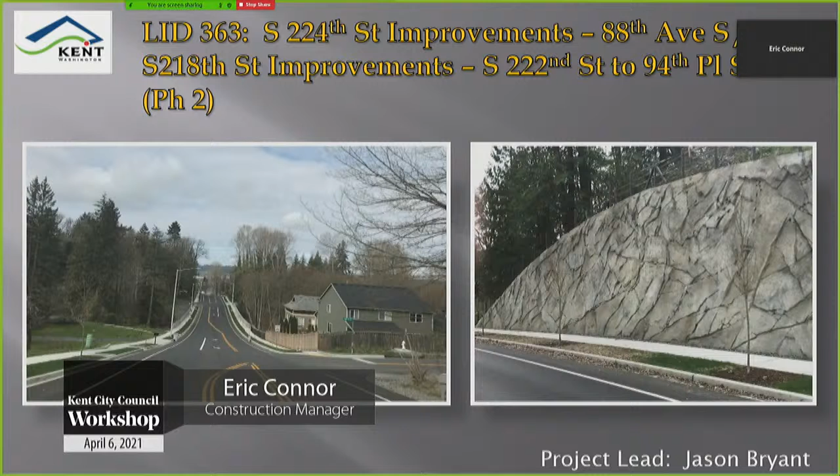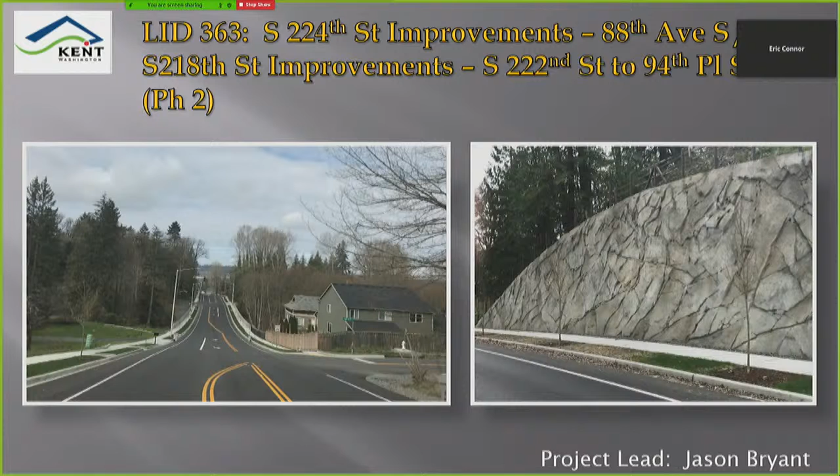New sewer main, water main, storm piping, storm detention, retaining walls, and a new bridge over Garrison Creek were all constructed as part of the widening and revised alignment of 88th Avenue South and South 218th Street.

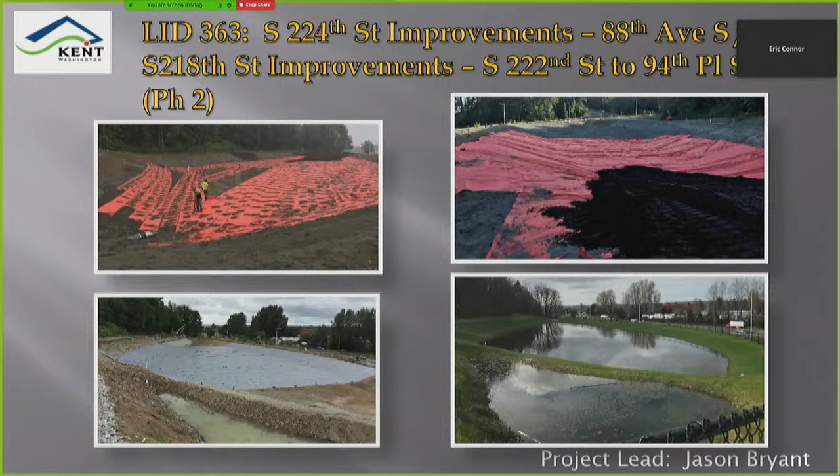One of the last orders of business as part of phase 2 was the final construction of the site's permanent stormwater detention pond system. This work had to wait for the dry and warm weather of the summer months of 2020. The pond was excavated and shaped, then lined with layers of sand, fabric, more sand, impermeable liner, another layer of sand, and a high visibility layer, and then finally the topsoil. You can see the finished product out there in the bottom right corner, a fairly recent photo from this spring.

Moving on to our next really big project, South 228th Avenue UPRR grade separation project. Jason Barry presented to the Public Works Committee while phase 4 was nearing completion.

Since then, phase 5 has taken over, completing some below-grade stormwater detention facilities, completion of fills required to complete the ramps to the new grades on both sides of 228th, ramps down to 6th Avenue, and several private business accesses and driveways, all while permitting full vehicle access to businesses and their employees, vehicle traffic, truck traffic, you name it. The guys have had to work around all that. This is not a small feat.

Fill material consisted of geofoam, lightweight fill, and imported aggregates supported by various types of mechanically stabilized earth retaining walls. You can see in the photos the white geofoam material that was placed to help prevent settlement in the future that could cause issues to the below ground infrastructure.

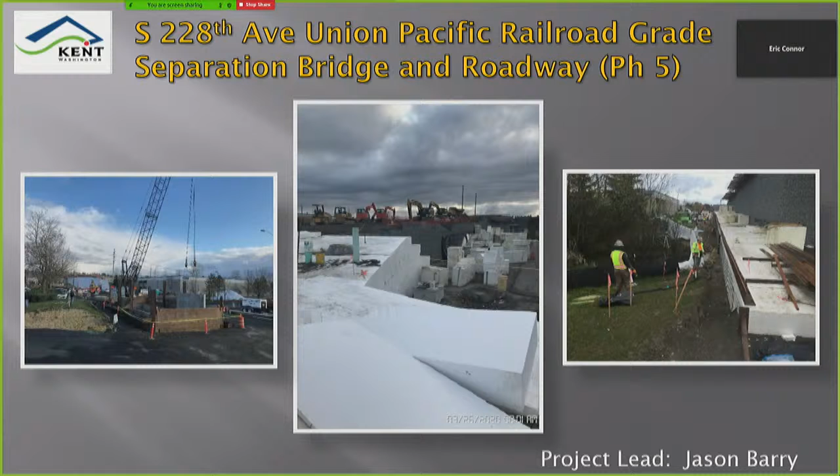As the earthwork was ongoing, the bridge construction was the project's critical path work. Concrete bridge piers were constructed. The three photos here show the bridge column rebar cages being formed in preparation for concrete placement, cross beams formed for bridging the three columns together, and then the completed structures ready for girder placement.

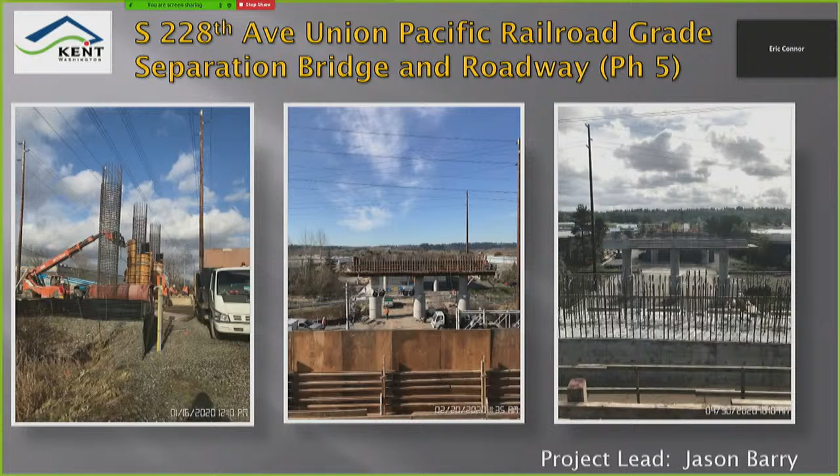Girder placement was a 4-day process for this bridge. Crews faced the challenges of working around the Union Pacific Railroad with no interruptions to the railroad, and working below a major high voltage power transmission line. Photos include the very first girder set in progress on day 1. You can see the two cranes working together in those photos to complete the girder sets. That's a very complicated, dangerous, and very sophisticated operation.

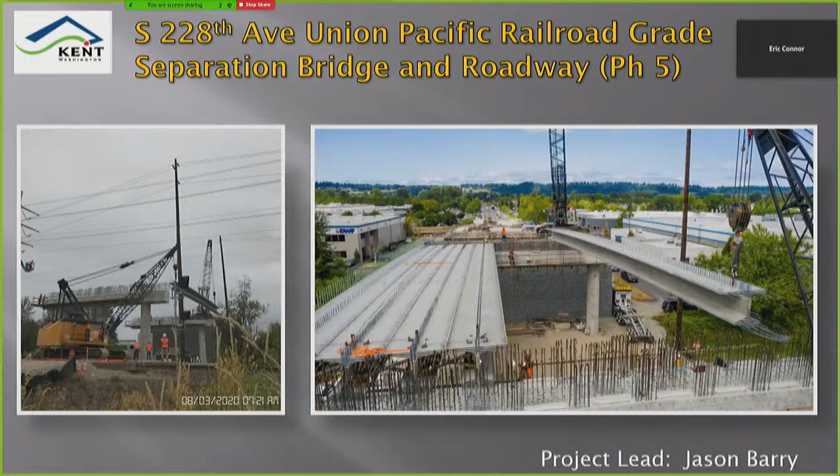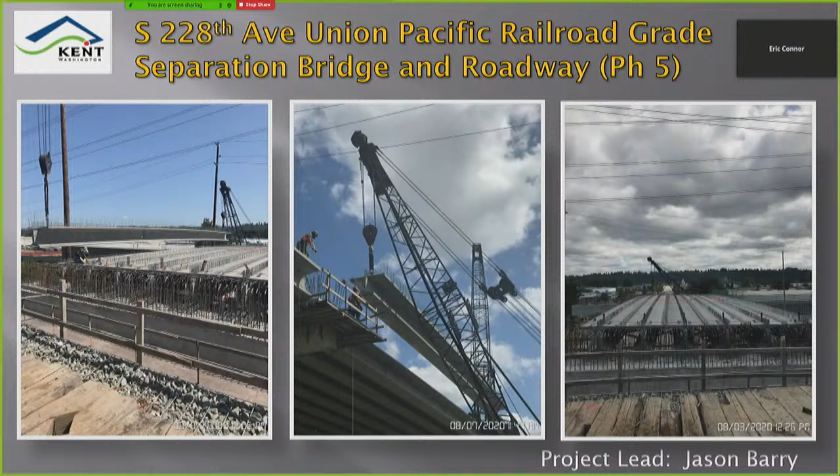Here's the final girder set, setting into place on day 4, with a couple different angles to look at it. That was the 24th of 24 girders. The last photos show one of the two spans with all the girders in place.

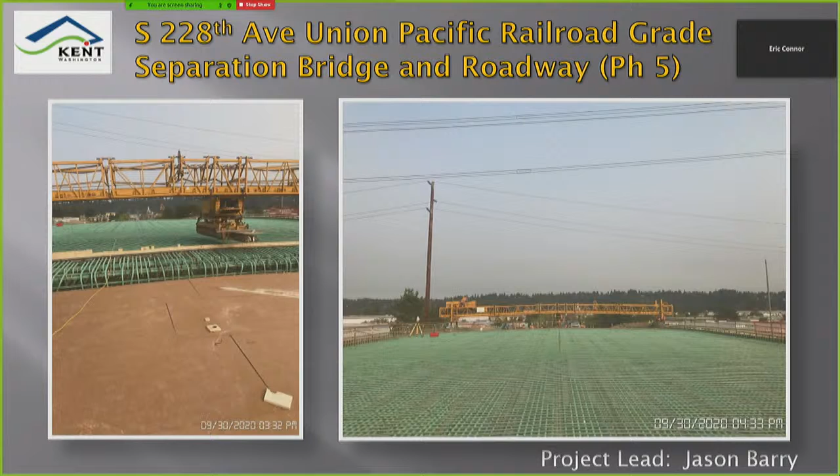And here's a look at the concrete crew and the Bidwell in action on the deck pour day. Once cured, diaphragm pours at each of the...

Once completed, diaphragm pours at each pier tie the girders together and the decking together. Approach slabs are also poured to connect the finished bridge deck to the ramps constructed out of aggregate fill and the MSE retaining walls.

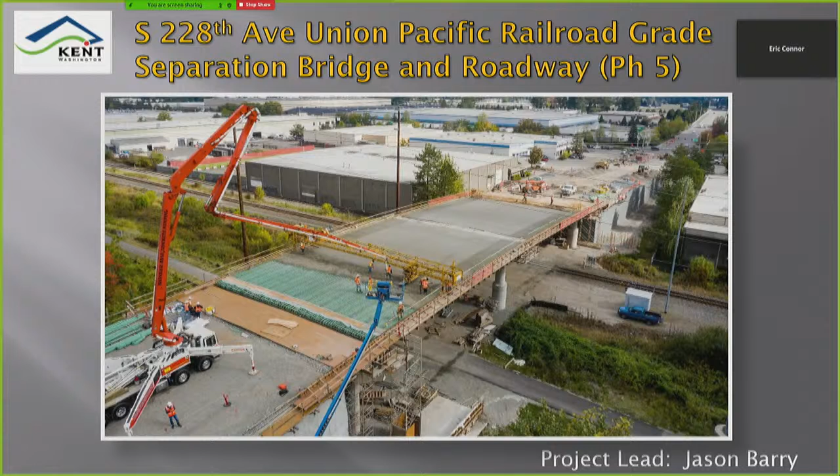After the bridge deck pour, structural crews turn their focus to the moment slabs and barriers in order to finish all the walls and bridge.

Concrete roadway paving also proceeded. Concrete paving was especially challenging with traffic management, just like the earthwork fill was. Traffic routes through the zone were rerouted about every 5 days on average.

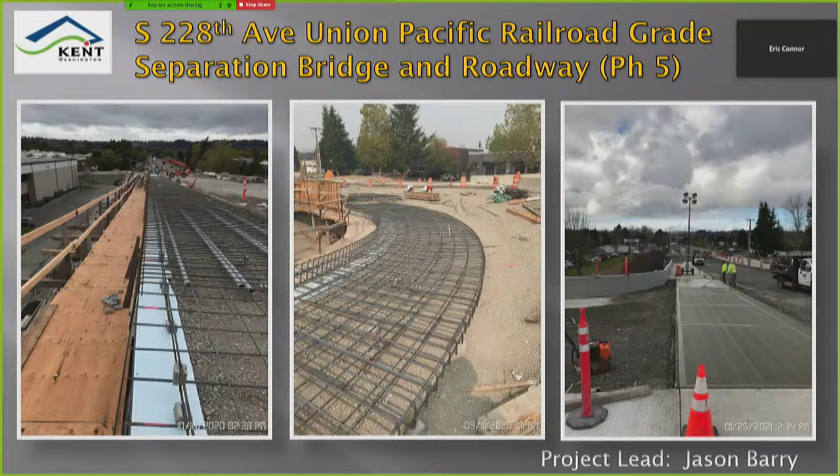So currently we have a project that is very near completion. Final installation of the illumination system is ongoing. Work in private parking lots adjacent to the building is being completed. Castings are being raised and final cleanup is taking place in preparation for the ribbon cutting next Thursday. The bridge will be open to traffic following the ribbon cutting.

Upper Mill Creek Dam is a multi-season project that was completed in 2020. The dam face was reconstructed and raised 4 feet with a new overflow spillway, controls, and discharge. In addition, a new fish ladder was constructed with diversion structures and high flow bypass.

The high flow bypass takes water into the reservoir from Mill Creek during high flow events. That bypass shows up kind of on the left-hand side of the right-hand photo. You can see it running through the trees there behind the houses.

We're very excited to see the completion of this project. Now that it's operating, we have one more tool to help control stream flows during storm events that produce high flows, and hopefully help with flooding in future events.

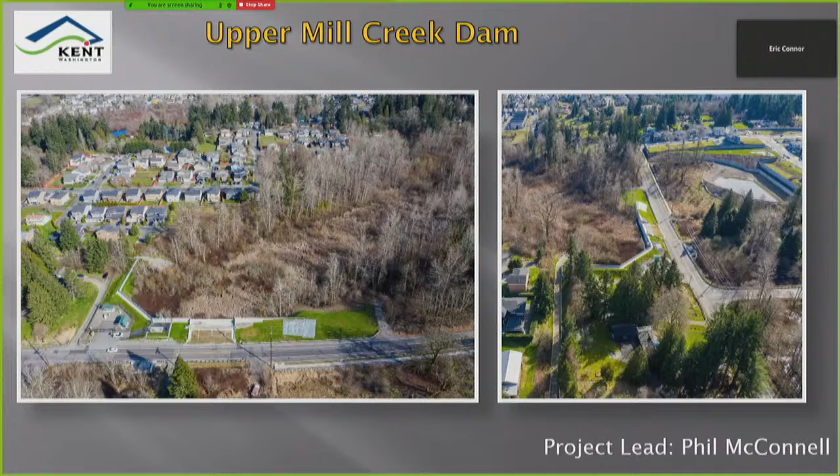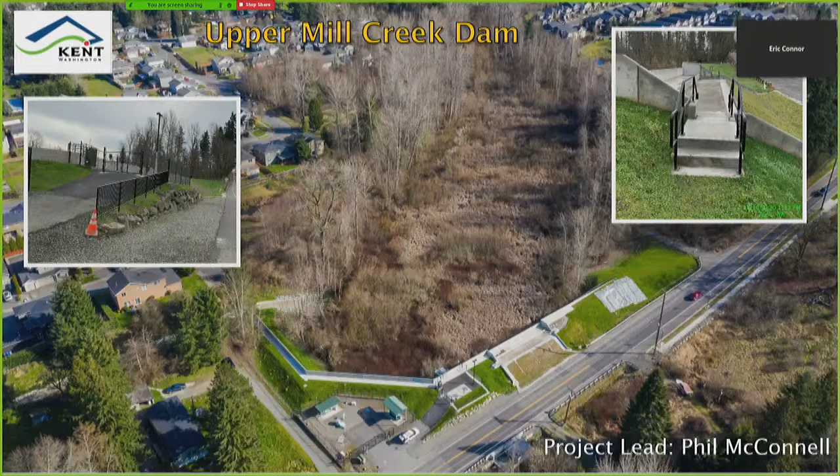On this slide, there are a couple of features constructed on the dam face. And the next slide shows the diversion structure that's kind of at the back side of the operation.

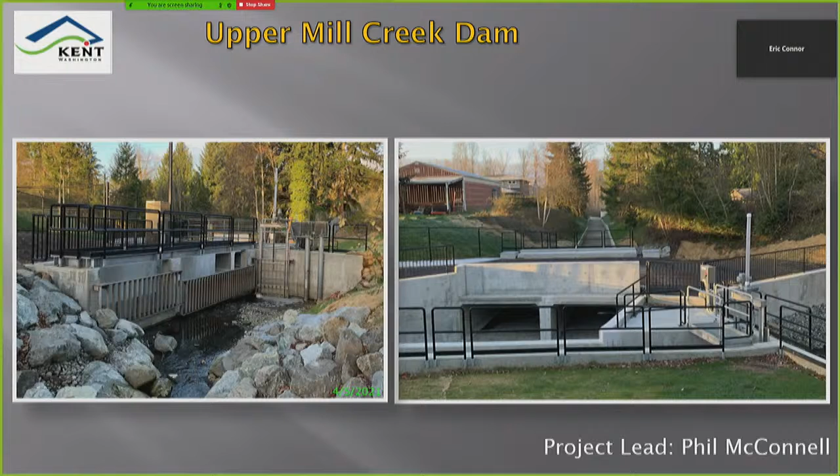You can't see it in the photo, but there's a fish ladder in there and a screen, and when the flows increase by a depth of 3 to 4 feet, which we control, the water is diverted down the channel. You can see it heading off there, and then it starts filling up the reservoir.

One of our other big highlight projects this year was 76th Avenue improvements. This was a fast-paced, hard-charging project from day one. The contractor was challenged with raising the grade of 76th Avenue about 4 feet while allowing truck and vehicle access to all adjacent businesses.

This was achieved by closing the road to northbound traffic and making it a one-way road southbound. One-way traffic was first routed to the east side of 76th, while fill was being placed on the west side, followed by construction of all new storm, water main, curb and gutter, sidewalk, and concrete paving.

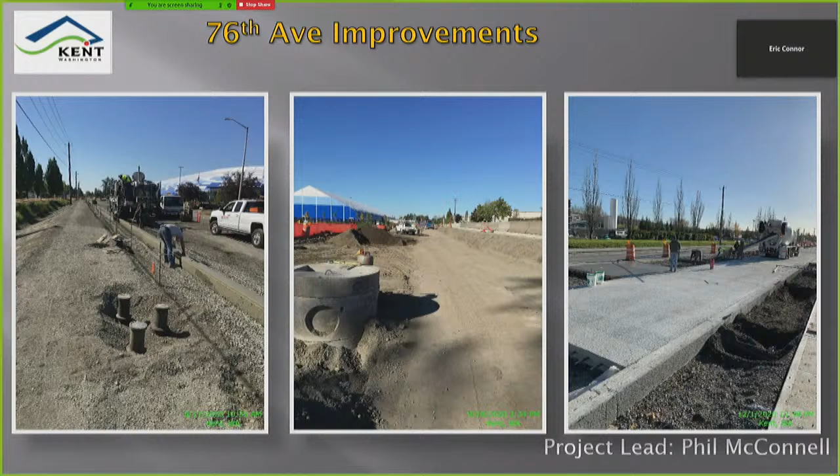Once that concrete was cured, traffic was diverted onto the new roadway on the west side, and the process was repeated on the east side.

Here's a photo of the concrete placement in the future northbound lane while traffic is running southbound on the original asphalt.

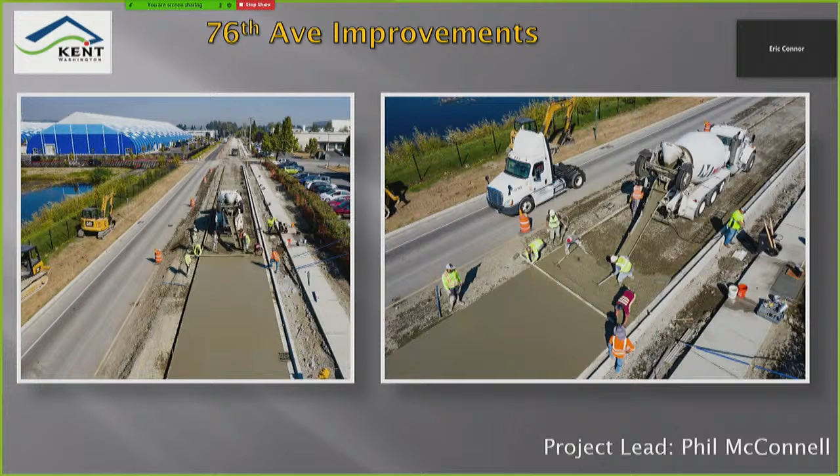Here's one more photo of the project in progress along with the finished project. Future phases of work on 76th Avenue are currently being planned or are in design. The road raising will continue north of this project to 72nd Avenue, and also to the south, with the addition of multiple culvert replacements to enhance flow in Mill Creek.

Councilmember Thomas, do you have a question about this?

Yes, thank you, Madam President. So am I to understand then that both northbound and southbound have been raised to the same height? Yes, sir. Excellent. Thank you very much. Yep, you're welcome.

Okay, now we're on to 4th and Willis Roundabout. This is one of my favorite projects that we did this year. The final product is a wonderful gateway to the city that enhances traffic flow, improves safety, and I really think it looks great.

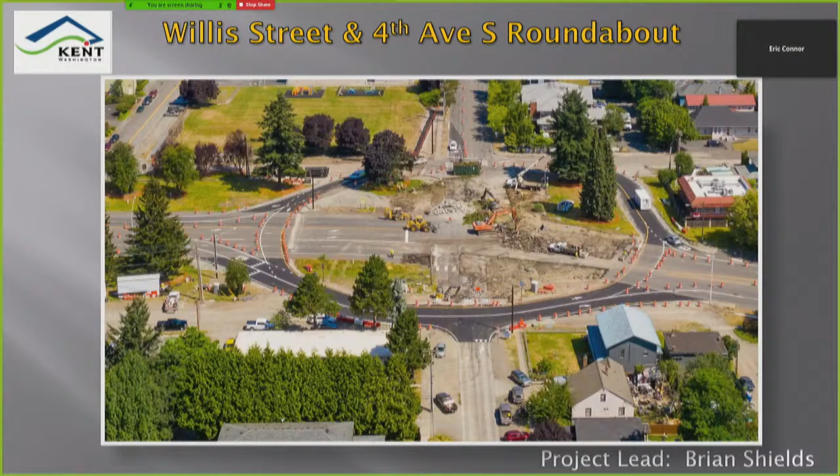What you see in the above photo of the job site is the completion of the first order of business. A temporary rotary was constructed to allow continuous traffic flow movement around the project, while the majority of the work was constructed inside the rotary. We were fortunate to have so much space to work with at this location.

Once the rotary was established, utilities were installed and the grade was raised in the middle of the old intersection. We raised it about 1.5 feet from what was originally out there.

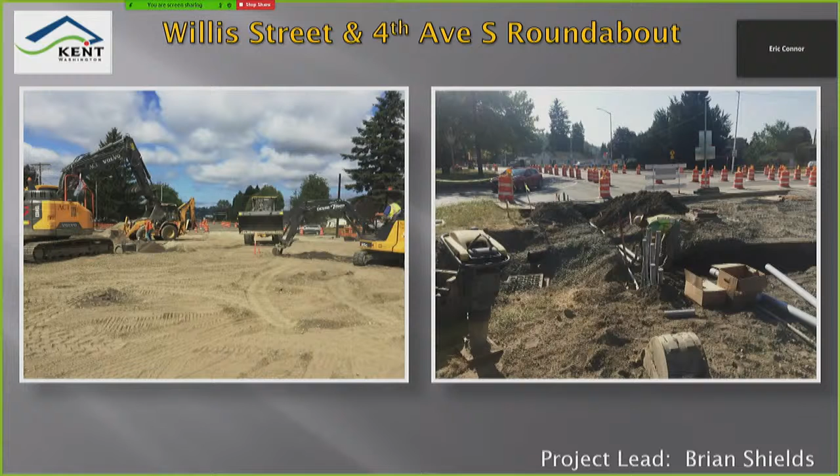With the new established grade and all the new storm pipe, water main relocations, and dry utility conduit in place, the concrete flatwork could proceed. With many different colors, shapes, and textures, the concrete work was a very integral part of the finished product. It adds both beauty and functionality to the project.

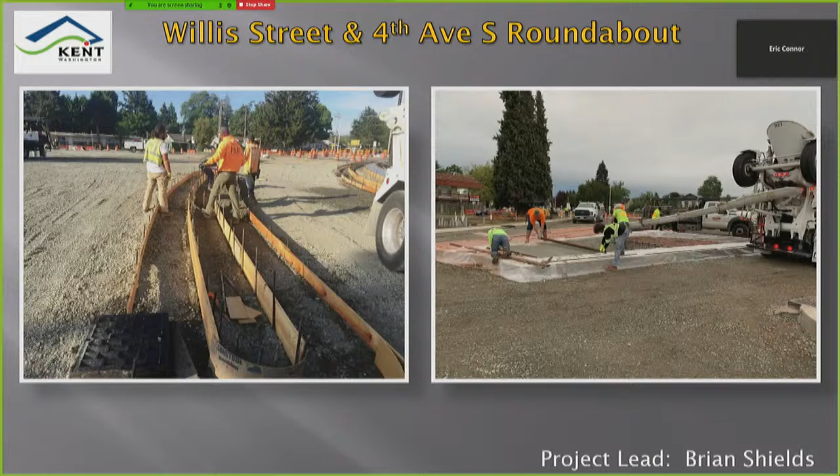Once the concrete flatwork is completed inside the temporary rotary configuration, then we finally get to pave. This took place in August when the region had some unfortunate air quality issues, but the guys persevered through it. Completion of the paving allowed the contractor to reroute traffic in a 1-lane capacity in the final configuration and start work on more of the outside elements where traffic was driving on the temporary rotary configuration.

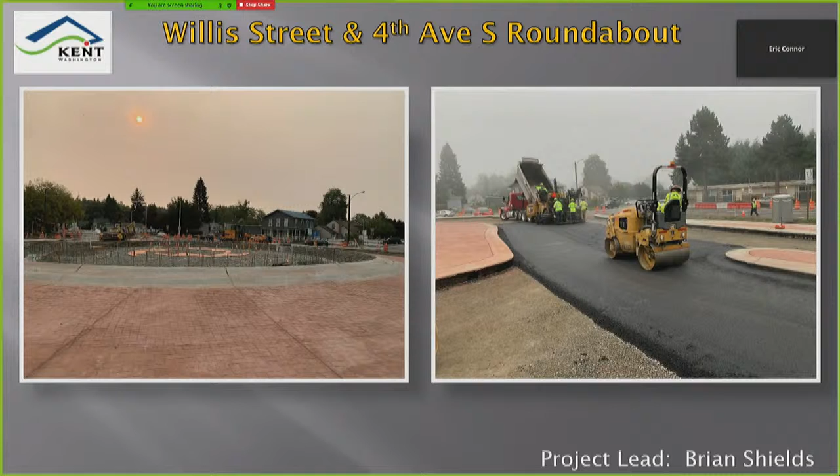This is also the point where the contractor was able to dedicate staff to the urban design elements in the center of the roundabout.

Going to do one more quick pause. I want to give a shout out to the City of Kent survey staff. With all the work going on in multiple projects throughout the city, they virtually dedicated a crew to this project full-time for an extended period. This project had more intricate detail and required more precision than any project I've seen since starting here in 2014. We really appreciated their dedication and quality of work.

The urban design elements in the roundabout center island are an example of their work. Please take note of all the different radiuses and points that had to be laid out for this construction. That is not easy stuff.

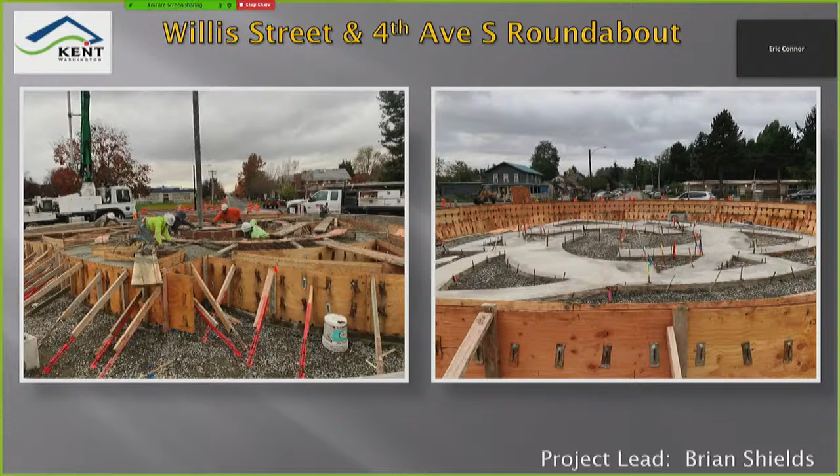I like this photo over the top of the center item. Both of these photos were taken after the final overlay paving and prior to striping while the asphalt was in its curing period. Traffic movement was maintained in a 1-lane configuration during this phase.

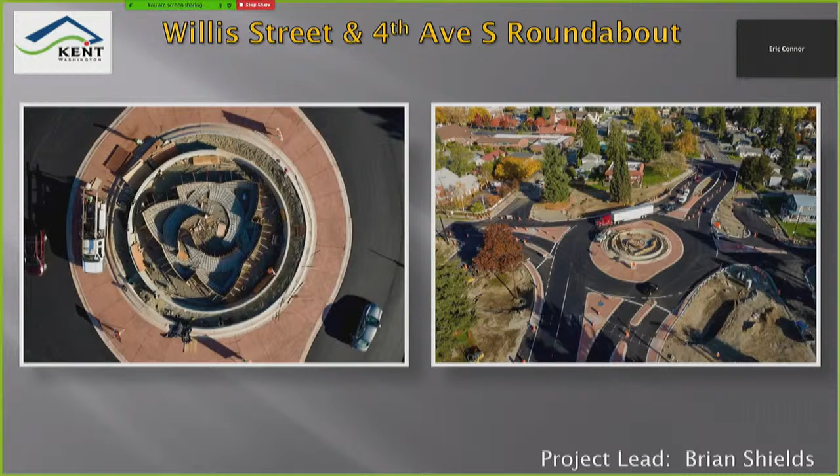Ultimately, that center art feature is going to have blast lighting that's going to be lighting up from the ground inside that artwork, and it's really going to make that Kent logo pop in there. I can't wait for that to get turned on. I believe they got the materials right now, so hopefully it's on by the end of the week.

However, it won't make the ribbon cutting that's scheduled for tomorrow, unfortunately.

Okay, some of the other projects: Green River Natural Resources Area pump station. We talked about Upper Mill Creek Dam and how it will benefit the city during storm events. This pump station is another one of those projects. It'll add control to the stormwater levels in GRNRA by pumping directly to the Green River.

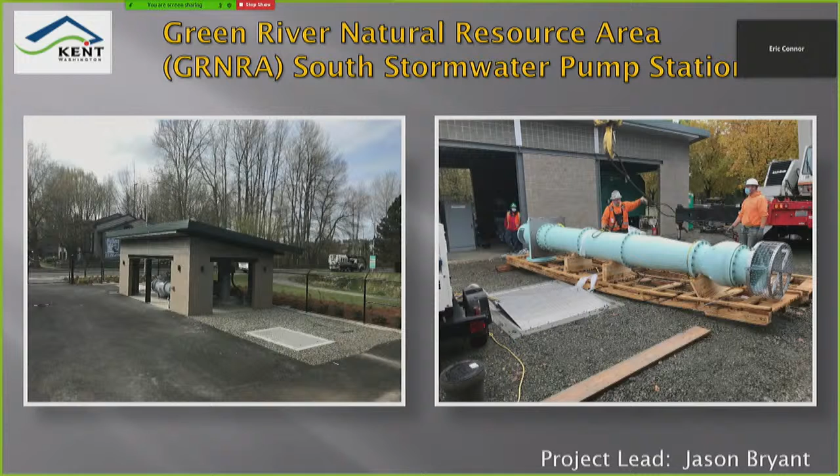This pump station features two 200 horsepower vertical turbine pumps with 24-inch discharge heads that pump into a 30-inch HDPE pipe that was installed on James Street during a previous contract in 2019. The photo on the right shows the intake for the pumps that measures about 18 feet.

Here's the constructed pumps and discharge system in their shelter.

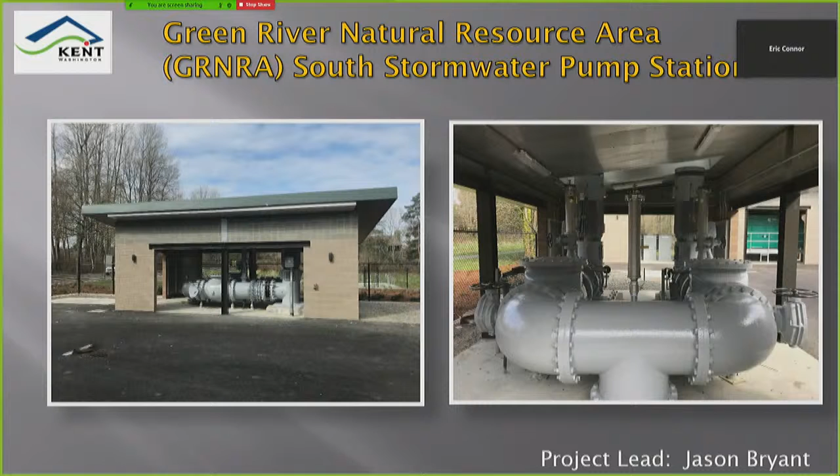And the project also includes a 300 kilowatt standby generator that'll run the pumps in the event of a power outage. This is a very clean, sharp looking project.

Now we're on to Meet Me on Meeker. This is something you've all probably heard about for the past several years. We're finally able to show some finished projects constructed to the new standard. We have two private development projects and two City of Kent projects close to completion. The first is the Meet Me on Meeker sidewalk / Riverbend driving range improvements, constructed from Ethos to Russell Road. It features a new raised crosswalk, a mid-block crossing between the golf course and driving range, a nice new promenade, and a rebuilt parking lot for driving range customers.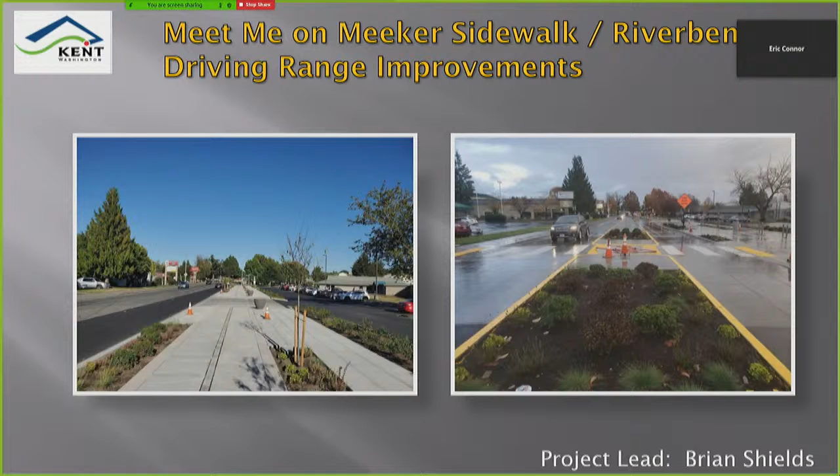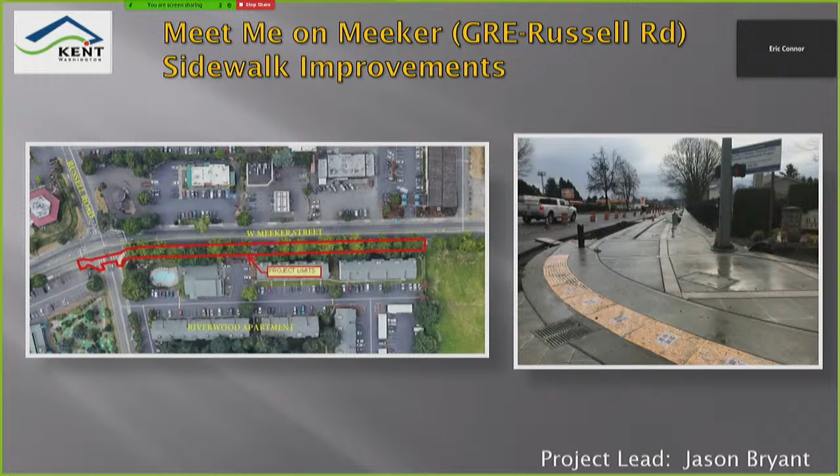The second City of Kent project with the new Meet Me on Meeker standard is the GRE to Russell Road sidewalk improvements. This project connects with the previous project at Russell Road on the west end, and Midtown 64, a private development, on the east end. It's all fronting the Riverwood Apartments. One of the main features is the newly constructed concrete crosswalk across Russell Road.

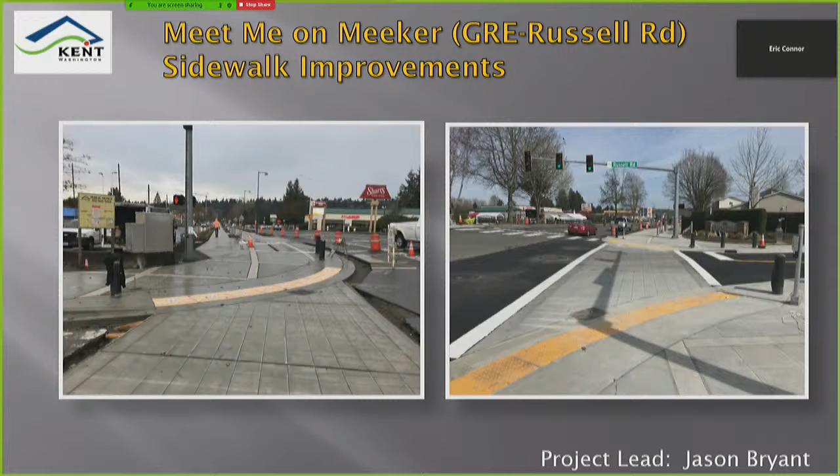The 2020 sewer CIPP lining project - CIPP stands for Cured in Place Pipe. We've just completed the second one in the last two years. This is expected to be an ongoing program to add lining to old pipe at risk of failure. This system adds structural stability to pipe that may be near the end of its functional life, adding at least another 50 years of service without doing any excavations in our streets. Though it may seem expensive, this installation is ultimately much more economical than conventional pipe replacement and significantly decreases disruption of traffic and the public in general.

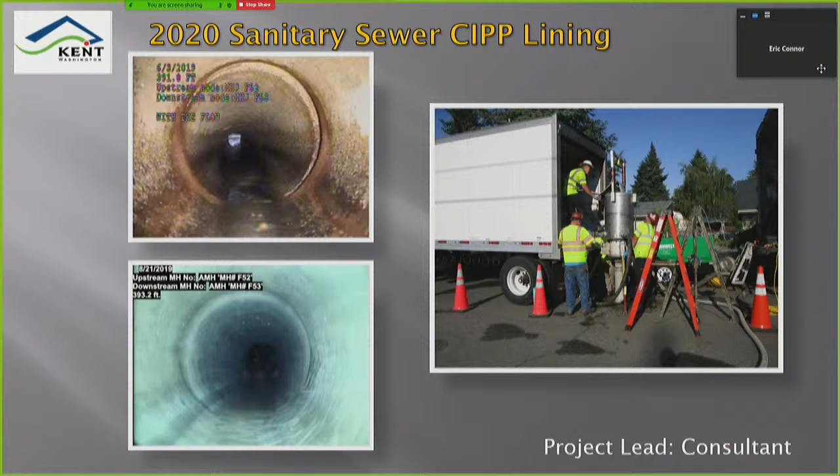Downey Farmstead - we've completed phase 3 this year with more to come. This land will ultimately be a high flow side channel for the Green River that will provide safe passage for salmon during high flow events. A similar project was completed several years ago on the Lieber property.

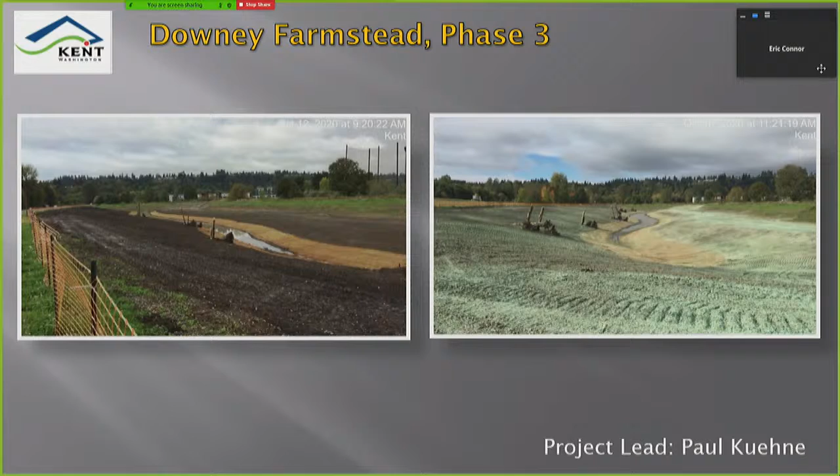We do several annual maintenance projects - annual paint line striping, crack sealing, and plastic markings replacement - but the major ones are the annual overlay projects.

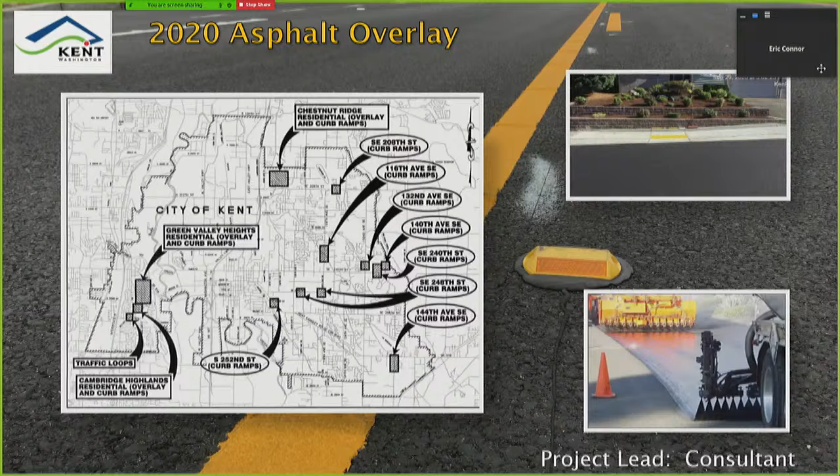Our asphalt overlay program is ongoing and making some nice progress. In 2020, we completed overlay and curb ramp replacements in three neighborhoods, in addition to curb ramp replacements at nine locations where City of Kent crews from the Operations Streets Department were completing grind and inlay projects. Upcoming in 2021...

We're doing fewer locations than 2020, however we're not doing a bunch of just curb replacement locations. We have seven locations where we're working, and six of them are doing full grind and inlay, and two feature the addition of traffic calming, similar to the speed hump you see in the lower right photo. Even more unique for this project, we will be incorporating chip sealing on Lake Fenwick Road at the appropriate locations. This will add new life to the streets for a lot fewer dollars per mile than the grind and overlay sites we've been completing over the past several years. Hopefully it's something that works out well for the city and the public.

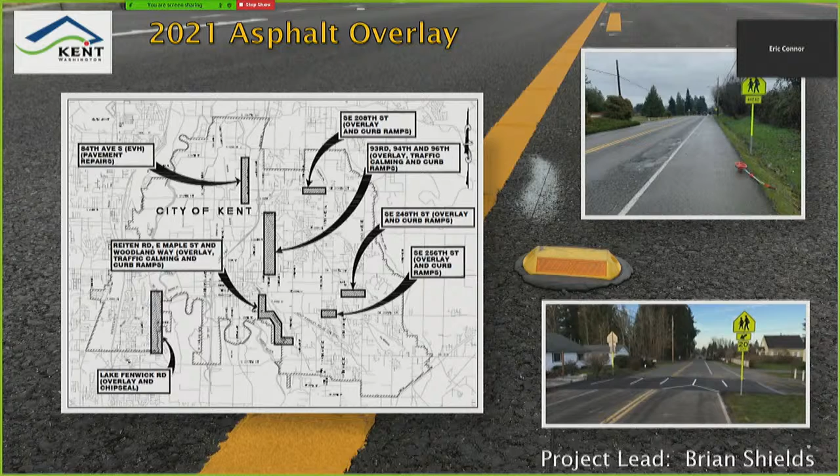Another overlay project coming up this year is the South 212th Street overlay. This project is funded by federal grants and will provide grind and overlay on South 212th from East Valley Highway to the concrete intersection we constructed back in 2018 on 72nd Avenue. In addition, design staff is working on another project on 212th from 72nd Avenue to the western city limits. That project will probably be a 2022 project, but 212th is going to get shaped up pretty nice here in the next couple of years.

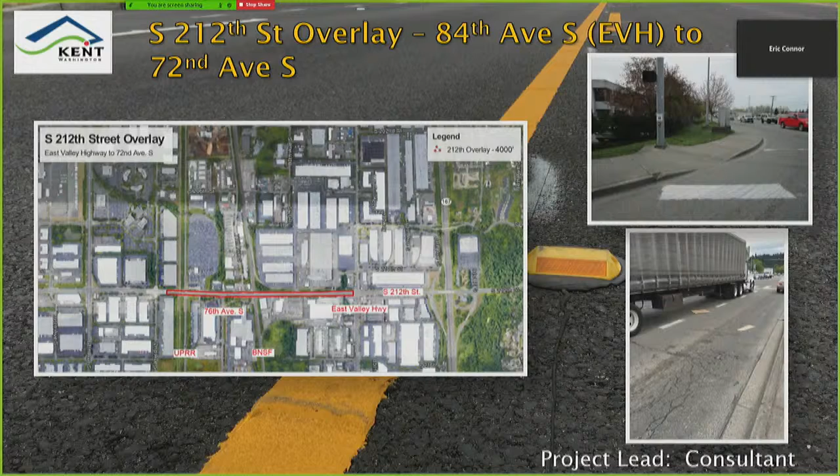Okay, Clark Springs. Got a contractor out doing a Clark Springs generator and electrical upgrades. This work started this spring, and it's provided an updated generator backup and controls to our existing water facility at Clark Springs. That project is over in Maple Valley on our property out there.

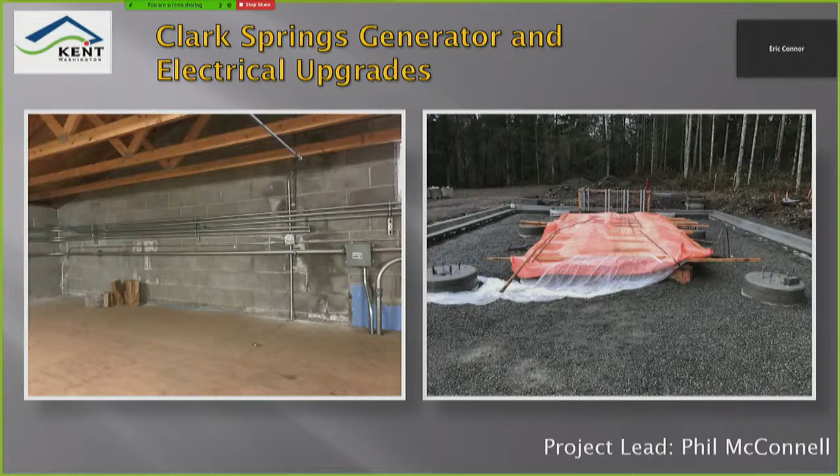And here's a big one that's really just getting rolling here in the past couple of weeks. West Hill Reservoir is a new reservoir that will have a capacity of about 5 million gallons and will give Kent residents on West Hill improved fire flow and more storage capacity during the dry summer months when there's higher demand. The contractor has just completed the 8,000 cubic yard excavation for the tank's 8-foot thick concrete base. Concrete work and site utilities will take place most of the summer, so we'll expect to start seeing the vertical construction of the actual tank itself begin this fall.

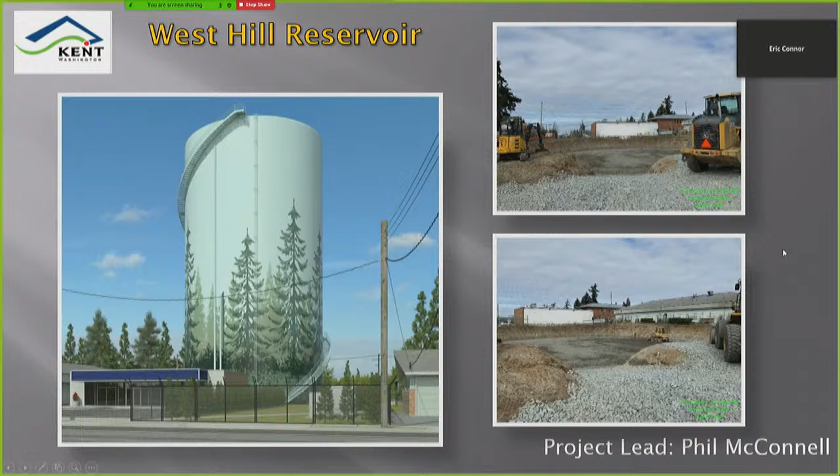Second and James pedestrian crossing, we're going to be adding a new crosswalk with flashing beacons for safe pedestrian passage between Kent Station and the North Park neighborhood. The contract is in the procurement stage right now, with construction expected to proceed later this month.

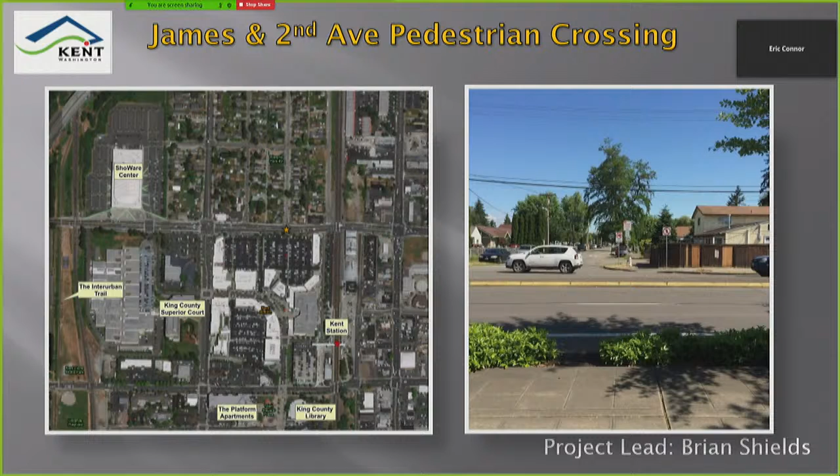The Lake Fenwick aerator. This project will be kicking off very soon. We have the pre-con scheduled for Monday next week. This project will be upgrading the treatment facilities inside a remodeled building at Lake Fenwick Park and reconstructing the aerator at the bottom of the lake.

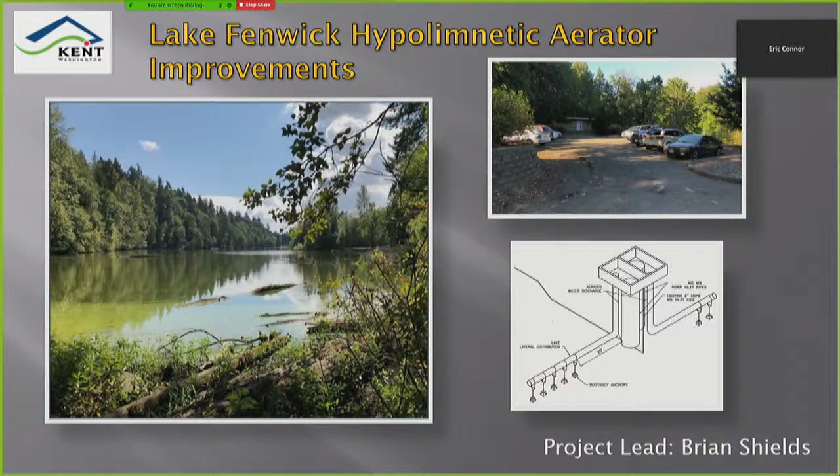And we have coming here pretty soon, hasn't bid yet, but it's scheduled to come out, is the 2021 water main replacement. It's replacing 2 sections of outdated water main in downtown Kent on East Saar Street and East Titus Street. In addition, this project will be constructing a new section of water main along the frontage of the new Alexa Gateway project up on Veterans Drive as part of the future West Hill transmission main project.

At our Clark Springs watershed property, we have a culvert carrying flow from Rock Creek across Summit Landsburg Road that is too restrictive during high flow events. As a result, staff from environmental engineering, along with a consultant, are designing a bridge that will be constructed in place of the culverts. The project is scheduled to bid and begin construction this season. However, the majority of the construction is expected to take place in the summer of 2022.

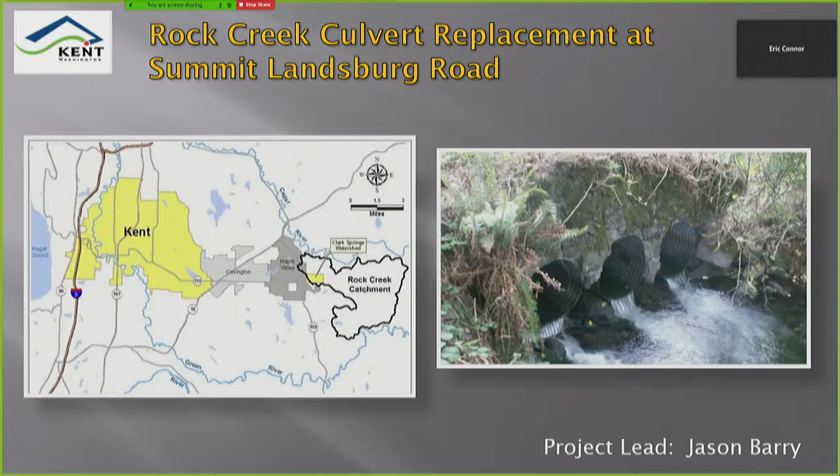My last capital job to talk about is the Washington Avenue pump station. This pump station is early on part of the Signature Point Levee project. This project is scheduled to proceed late 2021. The new pump station will be installed on the east side of West Valley Highway, replacing the existing facility that is on the west side of West Valley Highway.

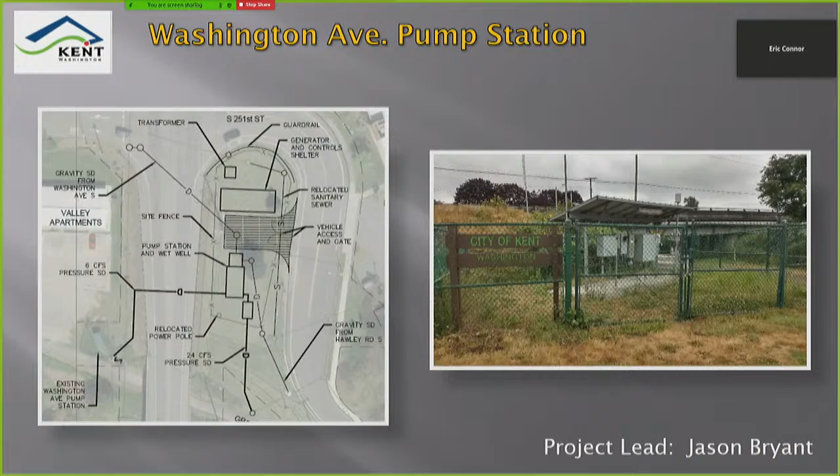So that's our capital stuff kind of in the past and looking forward a little bit. So now I want to share a little bit about some of the private development projects currently taking place and the staff that we have looking after them.

We have 3 staff members that look after all the private construction in town that takes place in our right-of-way or impacts our city-owned infrastructure, plus 1 staff member that looks after nearly all the private utility work that takes place in town. This is the PSE, Comcast, CenturyLink work that you see those guys working all over town all the time. Dave Devine is the group supervisor. Jay Mounts is our inspector that looks after all that private utility inspection. Josh Harris, a senior construction inspector, and Adam Campbell, an inspector, look after all the private development projects, with Dave actually looking after some of the projects.

This is a small group of guys that are involved in a vast amount of work all over the city. Work we are responsible for includes side sewer connections, short plats, residential developments, private commercial construction, and city right-of-way infrastructure work associated with projects contracted out by other municipalities such as King County and Sound Transit, who are in town right now doing projects.

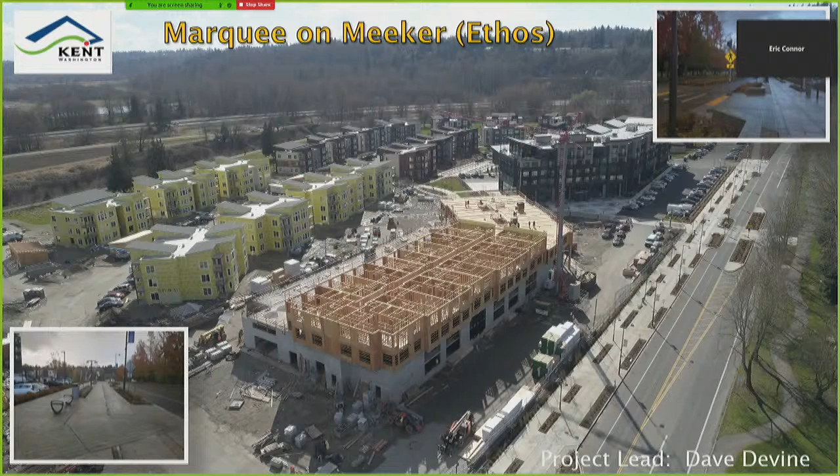Councilmember Thomas, your hand is raised. Did you have something? Yes, actually, it goes back to the other, but it doesn't matter. We don't have to do anything with the slides. So thank you, Madam Chairman, on that, and Madam President. When you were doing the curbs and sidewalks, it brought up something that reminded me of another thing.

Wheelchair ramps, for example. How are we doing on those? We can incorporate a vast number of curb ramp replacements in every project. I know design staff is working on a few other projects that, if Chad is still on board, maybe he can speak to some of those. But well, I know on the new construction, I understand that. But what about the city itself? How are we doing? Are we to the point where we can say all the corners have ramp accessibility?

Hi, Councilmember Thomas. This is Chad. We're not there yet. I wish I could say we were there, but we're not there. Rob Brown's group has put together a plan on how we're going to approach the existing intersections and what we need to do to get them to compliance. We're slowly working through those. And then if we get special requests at certain locations from folks who are using the intersections a lot, we focus on those.

And can you give me a ballpark percentage of how many are completed? In the downtown area? Not offhand, but most intersections have ramps. One of our issues is that the ramps that were constructed in the 70s and 80s don't necessarily meet the standards that were developed in the 90s. So in a lot of those, we have ramps that technically a person can get through, but it doesn't meet the standards. So I'll work on getting your percentage, but I'll tell you that it's a relatively low percentage.

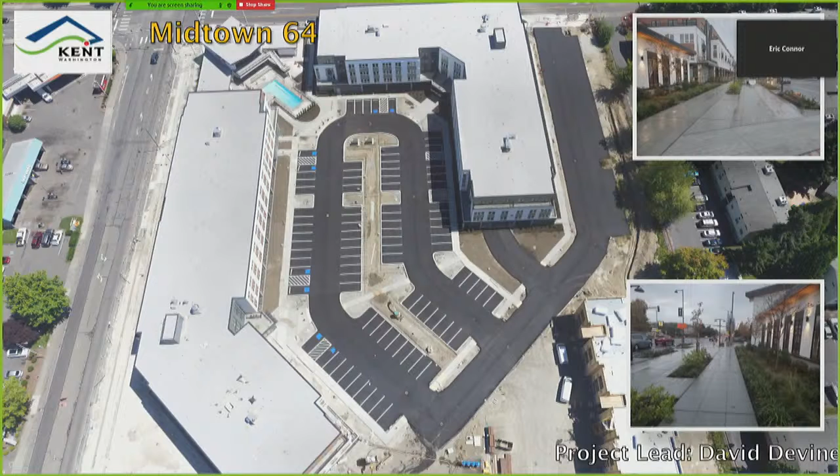So carry on back to the development projects. Midtown 64, this one is also on Meeker, building to the new standard. This project is a wonderful looking project that is very close to completion as well. This, along with Ethos, are great additions to Meeker Street and really great additions to the city. So we're happy to be part of the team on seeing these projects get built.

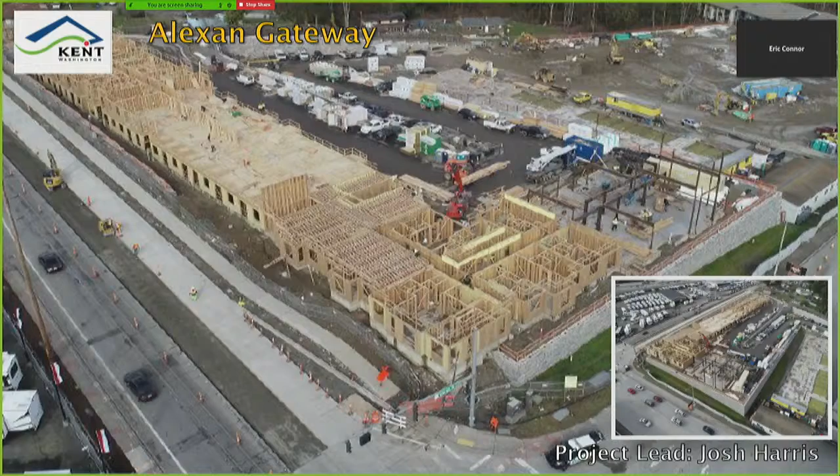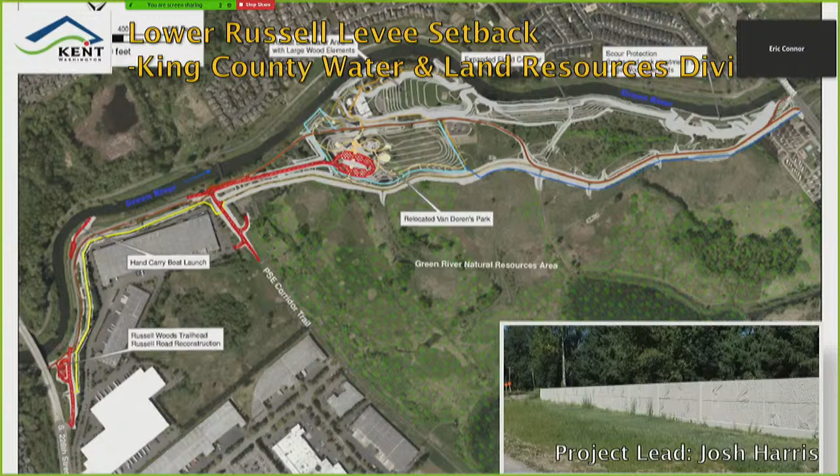Then the Lower Russell Levee Setback. This is a capital project by King County Water and Land Resources Division. Though it's a King County project, the city's environmental staff is deeply involved, and our staff in construction is providing inspection on relocated utilities and new city facilities. So that one is going to make a good push this year, but I think it's probably going to wind up going into construction for another season after this summer.

Then my last slide, Federal Way Link extension. Our city of Kent inspectors aren't involved with the work you see in that photo, but we're definitely going to be deeply involved in this infrastructure. A lot of new city streets are getting built and unbuilt, and we're going to be deeply involved in that for a long time.

What's neat about this picture is the first girder set for this project in the city. It just took place last night. Kelly Peterson shared that photo in the bottom left with me this morning, so we got that incorporated in. We're fixing to see a lot of changes, and there's already been a lot. They're just about ready to get their permits for the Kent Des Moines station, so we're going to really see a lot of things moving forward. It's going to be extremely busy for a long time to come.

So, well, thank you for listening to me. If you guys know me at all, you know I don't like to talk a whole bunch, so I appreciate you hanging in there with me. If you have any questions, I'm happy to answer.

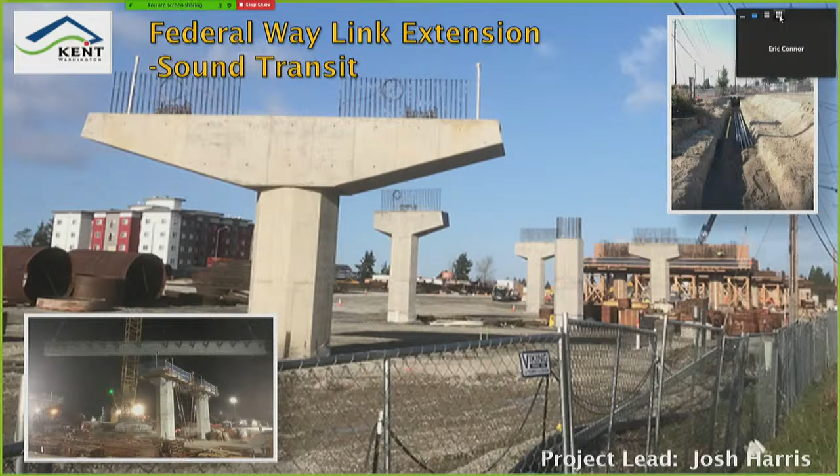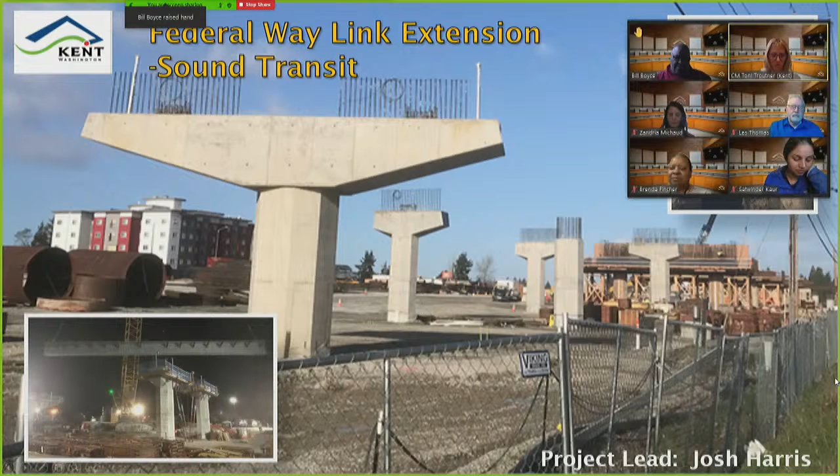Great presentation. It's always so fun to see the pictures, some of the aerial pictures where you actually get to see how the projects really look and compare them. Thank you so much for this update. I am going to start with Councilmember Boyce, followed by Councilmember Fincher.

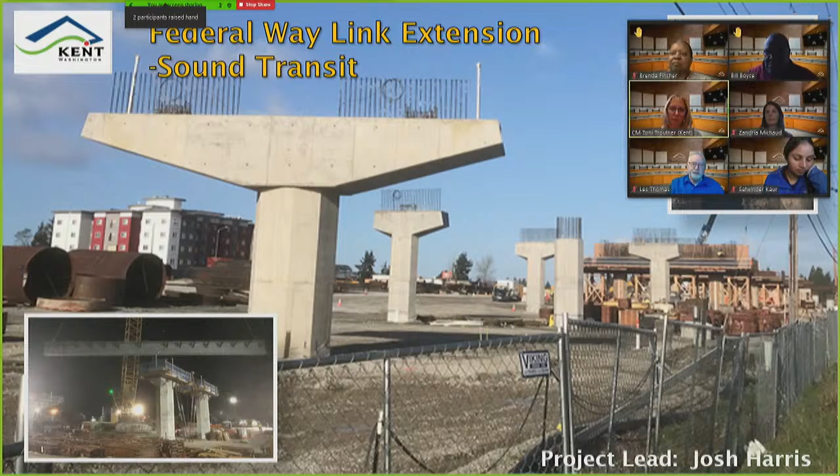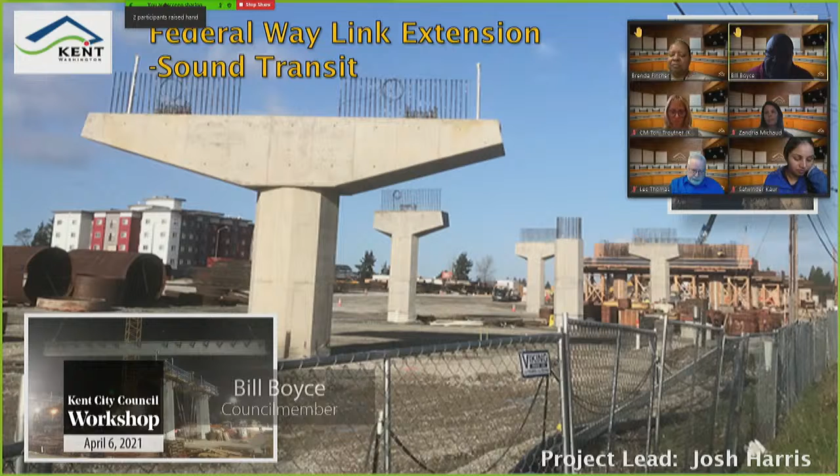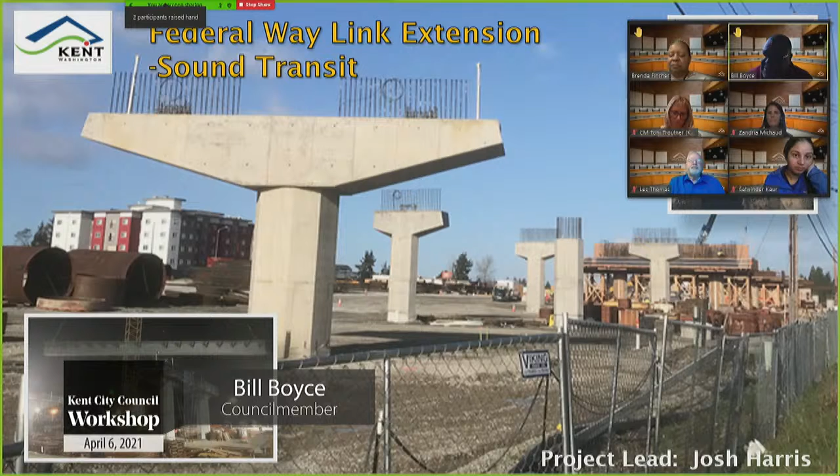Thank you, Madam President, and I apologize for being late. Eric, you might have talked about this here, so don't go into too much detail, but I have a question about overlays. Some of the intersections, for example, 256 and 132nd, and 116th and 256 -- it is a disaster. You've got to drive around so you won't do damage to your car, and it's been like that for a while. Was that part of some of this presentation on how you guys are going to attack some of that, or is that something totally different?

I didn't really go into that detail. However, 256 and 132nd, I know the intersection you're talking about, and that one is scoped in the 2021 overlay project.

What about 116th and 516? That's worse than 256 and 132nd. Gosh, I don't remember that one specifically. Maybe Chad can chime in again -- do you recall that one?

Yeah, 116th and 256, we're going in, we have an overlay on that. 116th and Kent Kangley -- the Kent Kangley portion is the state's, then the 116th portion is ours. So we'll take a closer look at our section and see if there's stuff we can do there. That 116th and 256 belongs to us, and we're working that into the project this year.

Okay, because those are really, really bad. I go home and I've got to drive around just to avoid the big hole in the road. It's a shame to come off that nice asphalt from the 256 project we did five or six years ago, and then hit that mess in the intersection. I got it. All right, thanks, team, appreciate your time. Thank you, sir. Your car can take it, Bill. No, I can't either -- it's too low to the ground.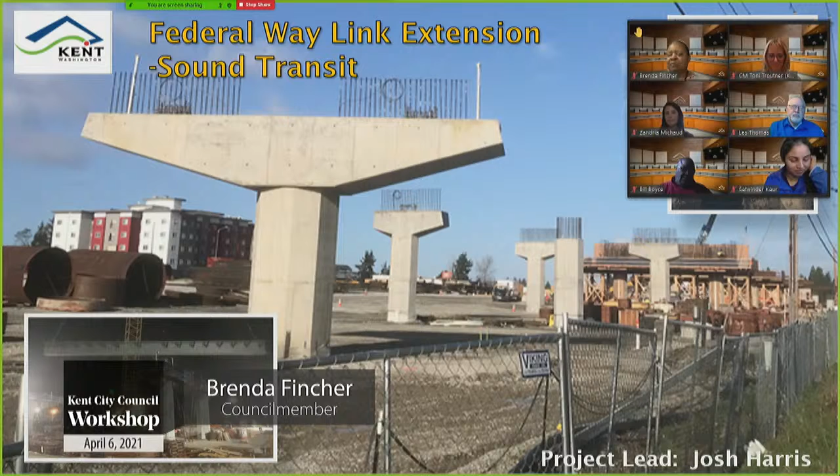It's really neat to see those projects get built and the vision of them continue to progress, changing the overall look of that area in town. Hopefully it just continues out there. It's fun to build -- I really like that part of construction, bringing new things out and finishing the projects.